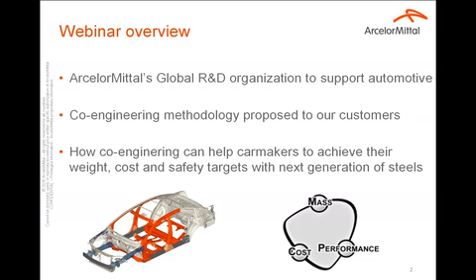ArcelorMittal is the world's leading steel and mining company, with a presence in more than 60 countries and an industrial footprint in over 20 countries. ArcelorMittal is a leading supplier of quality steel in the major global steel markets, including automotive, construction, appliances and packaging. In 2014, ArcelorMittal had revenues of 79 billion, a crude steel production of 93 million tons, and iron ore production of almost 64 million tons.

ArcelorMittal has world-class research and development and outstanding distribution networks, with 1,300 researchers in a worldwide network of 11 labs, with also $259 million invested in 2014.

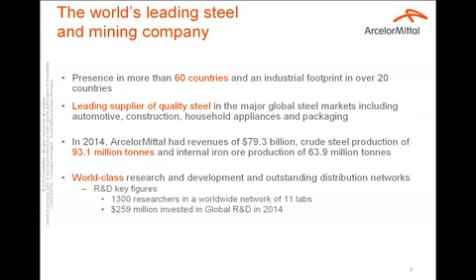Global ArcelorMittal is also the technology leader for automotive, with 5 global R&D labs dedicated to the automotive industry. 3 of them are in France, in Europe, and the 2 others in NAFTA, in Hamilton and East Chicago. 565 engineers and technicians are adapting steel to the evolution of automotive customer needs, meaning developing new steels and solutions.

improve steel in-use properties, find anti-corrosion solutions, invent breakthrough products, and ensure technical services to our customers to show that steel has the best compromise between weight reduction, comfort, safety, and cost.

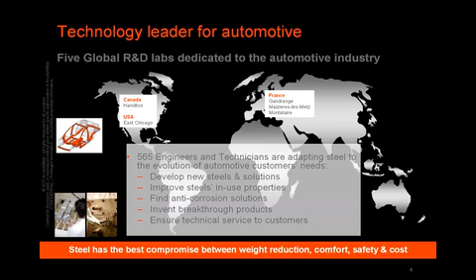Global R&D also has a dedicated resident engineer network, bringing technical support to customers around the world. We have 14 resident engineers in NAFTA, 12 in Europe, and also people from ArcelorMittal in Asia, with an office in Tokyo for the Japan market, and also resident engineers in China and Brazil.

This network has built strong and deep relationships with our biggest customers, and we are working with them in committed co-engineering programs.

Global R&D can provide technical services at all stages of the vehicle life, from advanced engineering to before the start of production - that means from 6 years before SOP till the SOP, where we are in the industrialization phase, and global R&D EVI representatives and processing engineers can support through stamping or joining issues, for example. But in this presentation, I will focus more on advanced engineering and co-engineering, where we can support the introduction of new steel grades and their industrialization and approval.

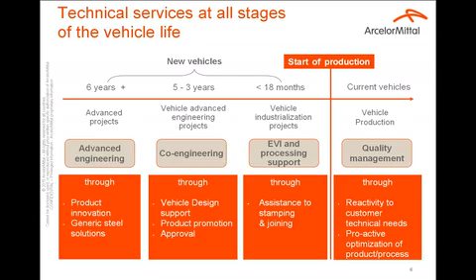This slide shows the main mission of global R&D automotive application teams around the world. Their main mission is to develop, promote and facilitate the use of new ArcelorMittal steels for automotive applications. Activities deal with steel solution engineering by design optimization, facilitating customer manufacturing - like forming, joining, laser welded blanks optimization - and providing guidelines and shop floor best practices, with a lot of simulation and experimental validations.

The teams can also provide technical support, and we have a contribution to process and product development by reverse engineering, where we look at the new generation of steels, keeping in account all specific requirements of automotive engineering. This research center has industrial size forming and welding equipment, with also a lot of finite element analysis capability, as is actually done in the automotive business.

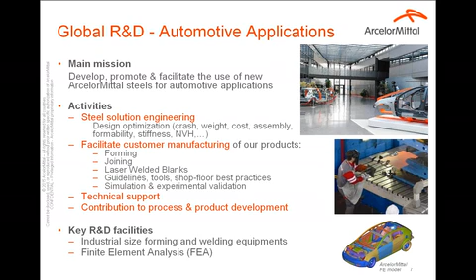That was for the first part. Let's go to the co-engineering methodology, more into details.

The objective of this co-engineering approach is to provide technical support for the design, optimization, and implementation of new advanced high-strength steel solutions. Our goal is to find and propose the best compromise between mass, cost, and performance. This co-engineering proposal is mainly dedicated to pre-projects in the advanced engineering phase of vehicle project development.

It starts always with a very important non-disclosure agreement between ArcelorMittal and our customers, and it can go through body-in-white review, to forming or welding assessments, through design and CAE optimization. Cost analysis can also be performed with our customer teams.

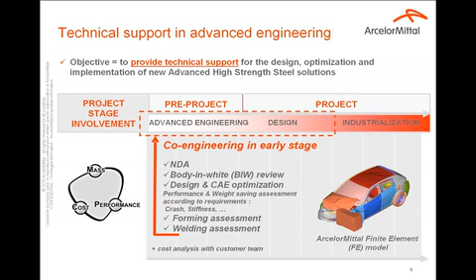Let's go into details in the co-engineering methodology. We split this methodology into 3 phases. Phase one, called body-in-white review, consists of a preliminary mass saving assessment with identification of potential mass saving solutions based on benchmark data, but also based on our steel grade properties and engineered steel solutions. I will go back on that later.

Phase two is what we call the refined mass saving analysis, based on grade and gauge optimization done mainly by numerical simulations. Phase 3 is the forming and welding feasibility assessment, where we can test and resolve different issues regarding spring back, hot stamping, roll forming, spot welding, or laser blank welding.

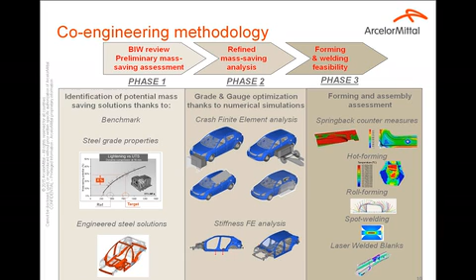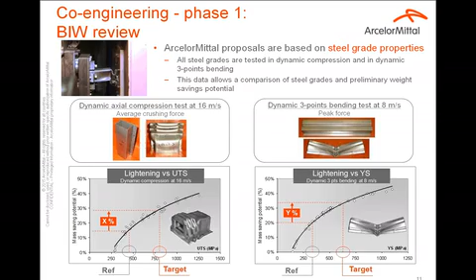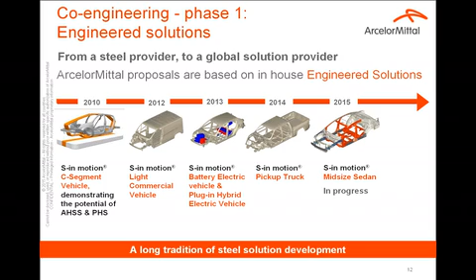As an example, we describe here our S-in-motion solution on a C-segment vehicle. We achieved a very light body-in-white proposal at 255 kilograms for an ICE powertrain on this segment, taking into account all new 2015 European crash requirements.

And then we adapted this solution to two new powertrains, battery electric vehicle or plug-in hybrid. We have shown that only 10 or 12 kilograms at maximum is enough to cope with the higher power and higher mass of the powertrains, which gives some additional constraints in the load cases and in the performance of the vehicle.

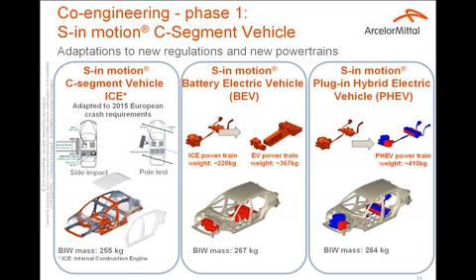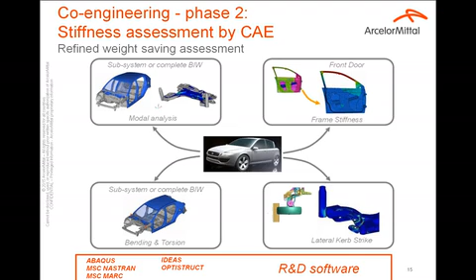As an example, here is the structural FEA capability of one of our research centers, R&D Montataire, for automotive applications. We have 350 cores available on 3 clusters in this research center. That means we can perform more than 10 full crash simulations in less than 24 hours with the LS-Dyna software. Now we will launch a video that illustrates this activity.

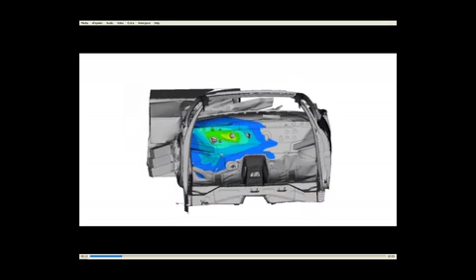Crash test simulations allow car makers to check the performance of car designs using innovative steel solutions that save weight while increasing safety. At ArcelorMittal's research center in Montataire, we run crash test simulations as a service to car makers so that we can co-design and co-engineer the car parts of tomorrow efficiently.

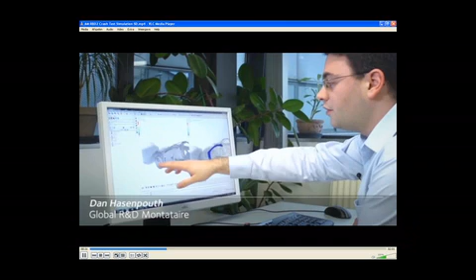We see here a simulation of a frontal impact. Here we have a barrier that represents another vehicle. What we can see is that there is a high level of intrusion using low steel grades, as shown in this picture, and we also see a lot of deformation.

I will show you now when we use higher steel grades. For example, we use Usibor on this part, and we see very low deformation and also a reduction of the intrusion for the passenger. So we increase both the crash performance and we reduce the weight of the vehicle because this part is thinner.

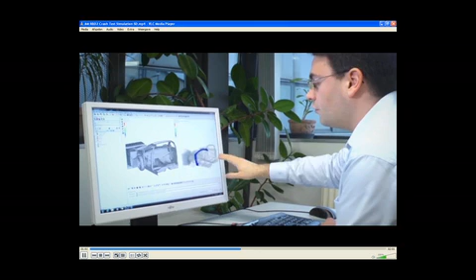These services to OEMs can begin up to 7 years ahead of a vehicle's commercial release, saving precious time and resources for vehicle manufacturers.

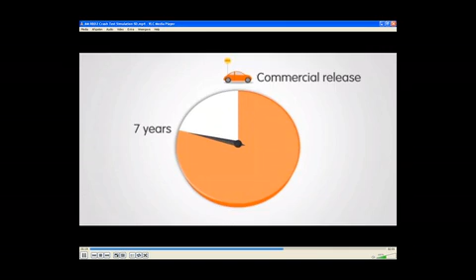The fact that we can do simulation here allows us to propose and test a lot of different solutions while avoiding doing actual crash tests that are both very expensive and very time-consuming.

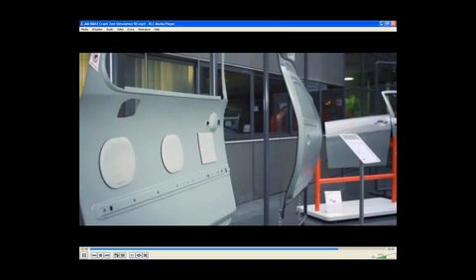We encourage car makers to approach us at any time in the design process to test the crashworthiness of their designs and of our new lightweight steel solutions.

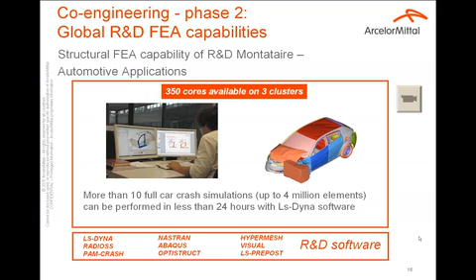Now let's go to phase 3, where we are looking at industrialization assessment. First, the assembly assessment, which is very important when we are proposing or dealing with a lot of advanced high-strength steel in the body-in-white structure.

Regarding assembly, we developed a 3-step strategy for validation. The first step is the use of assessment tools that we developed.

We run a kind of risk analysis very quickly, so we can identify all vehicle stack-ups and define the most critical or difficult ones.

Then, in the second step, we can run some numerical simulation using the software SORPAS, but with in-house or adapted data for each steel grade.

These simulations are really helpful to give optimized parameters in welding to get a satisfying welding combination.

Then, of course, we can go to experimental validation for the most difficult ones.

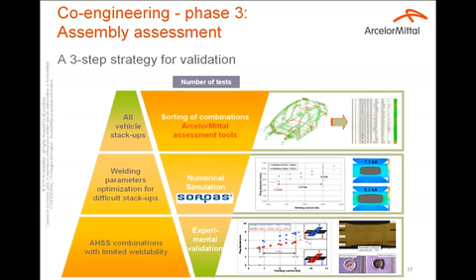Regarding forming assessment, we have the same approach, an iterative approach, from expert validation to a one-step simulation approach, and incremental simulation for more complex parts.

Then to very complex simulation like for hot stamping, where we have developed a thermomechanical simulation for our Usibor 1500 product and PHS family.

This technology has now been transferred to ESI company and is available in PAMStamp software for running hot stamping forming simulation.

Same for spring back control with our UTIFO tool, which is now also in the PAMStamp package.

And then, if needed, and especially with our customers on specific programs, we can go to experimental parts by tryouts. As an example,

Here we present the hot stamping feasibility assessment we run on laser welded blank door ring reinforcement, which is a very innovative solution.

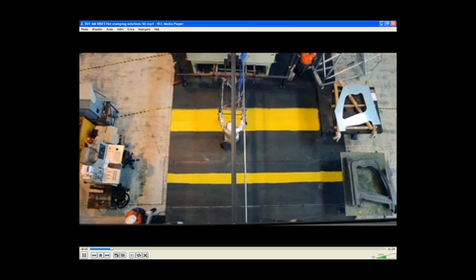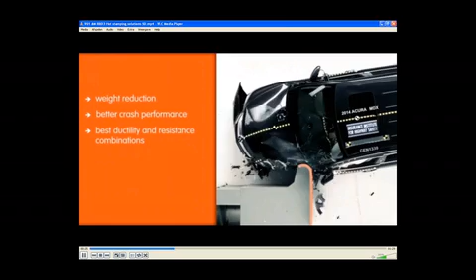Hot stamping technology provides many known benefits to car makers: weight reduction, better crash performance, best ductility and resistance combinations, excellent corrosion resistance, and lower total manufacturing costs.

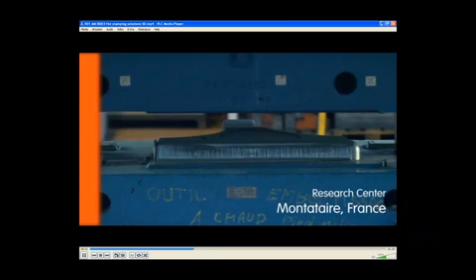At ArcelorMittal's Montataire Research Center in France, tests are carried out as a service to car makers that want to assess how specific steel grades behave after hot forming.

ArcelorMittal also has facilities to design and test specific parts using 3G geometry, grade and gauge optimization.

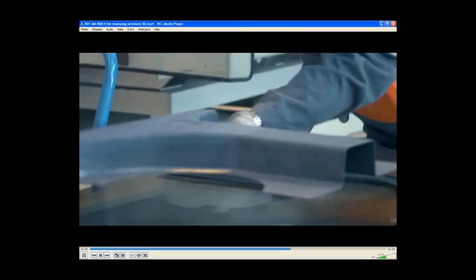We also put every effort into developing our own generic solutions, such as the S-in-motion laser welded blank hot stamped door ring. Customers can take advantage of this unique opportunity to test prototype steel solutions on a small scale prior to final testing and full production.

Thus saving precious time and resources.

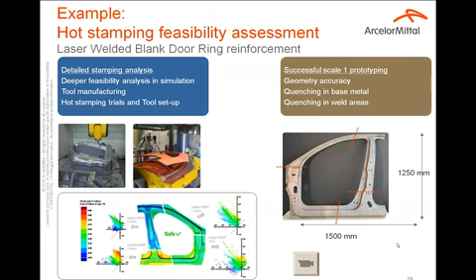The last example is the laser welded blank design optimization that you can run in this third phase, starting with a blank nesting optimization to increase the material utilization rate, which is very important for cost reasons, and also in-house forming criteria developed for weld seam area analysis in between both sub-blanks along the weld seam.

Then we can also run stamping trials. Here we have chosen one example regarding our new grade for exposed panels called FF280DP, full finish 280DP. It's a dual phase grade for exposed panels. So we ran stamping trials in our press shop on very thin gauge to assess dent resistance and red-through on door panels.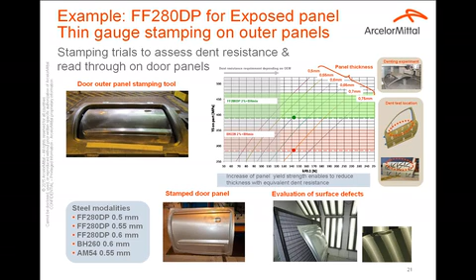So I propose to move to the last part of my presentation, dealing with the next generation of advanced high-strength steels and press hardenable steels, to achieve the weight, safety, and cost targets in the future.

Here I will present very recent results of our latest S-in-motion body-in-white mass reduction study with this new generation of advanced high-strength steels and press hardened steel. The perimeter is again the C-segment vehicle body-in-white.

We used our new Fortiform family for cold stamping: Fortiform 980, Fortiform 1050, Fortiform 1180, and also MartINsite, the latest MartINsite grade in development, 2000, and also our two new grades for hot stamping, the Ductibor 1000 and Usibor 2000.

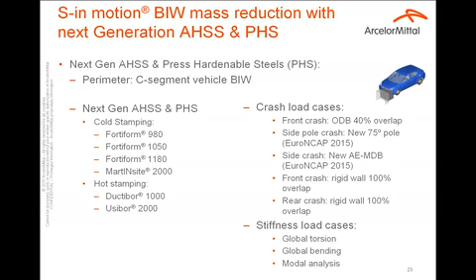We took into account, as explained before, all the major crash load cases to assess the solutions in front, side, and rear impact, and also stiffness load cases, like global torsion, bending, and modal analysis.

Some words about these new steel grades, the Fortiform family. The Fortiform family has three strength levels: 980 MPa, 1050 MPa, and 1180 MPa for tensile strength. In the table, you have the specific mechanical property targets.

This Fortiform grade has high formability combined with high cut edge stretching resistance. They also have very good resistance to hydrogen embrittlement.

With this high formability, we can really provide weight saving: from DP600 to Fortiform 980, same for DP780 towards Fortiform 1050, and from DP980 to Fortiform 1180. We consider that 10% weight saving can be achieved thanks to this switch.

The next generation of press hardened steel consists of Ductibor 1000 and Usibor 2000. We developed these new steel grades: Ductibor 1000, to provide 15 to 20% weight savings compared to Ductibor 500 currently used in laser welded blanks with Usibor 1500. And Usibor 2000, we estimate, can provide around 10% weight saving compared to Usibor 1500.

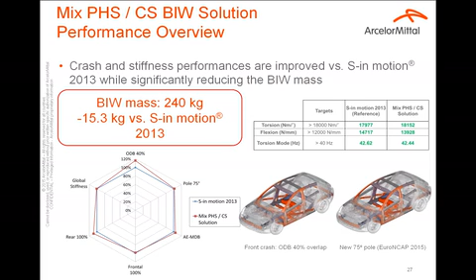In conclusion, ArcelorMittal Global R&D has a long experience in automotive steel grades and in engineered automotive solutions. ArcelorMittal Global R&D has also developed FEA capabilities, simulation tools, and equipment to support our automotive customers for the implementation of new steel grades and solutions in the next generations of vehicles.

Steel Solution Engineering clearly outlines the performance of ArcelorMittal's next generation automotive products in terms of weight savings, but also in passive safety. Co-engineering from design to prototyping, as I described today, is the best way to assess these solutions regarding all specific requirements, providing real added value for car makers.

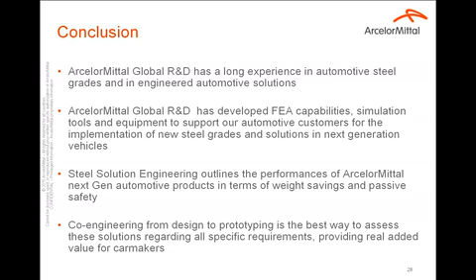Thank you, Olivier. That's an interesting presentation. We have quite a few questions for you here, so we will start off. Some of these refer to particular slides, so I'm assuming they want a little clarification, because I think a little earlier on we were struggling to hear. The audio quality wasn't great.

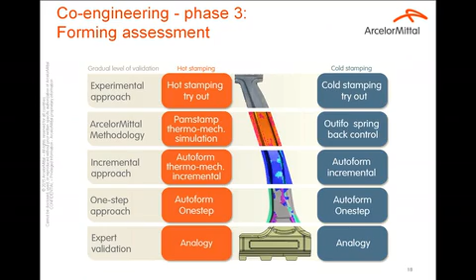But I'll start off. Questions regarding slide 14, and the question is: SPOC included? So I'm assuming you want some clarification on slide 14. Is SPOC... Excuse me, Nick, slide 14 you said? Slide 14, yes, yes, it's referenced in the question. I'm assuming the viewer didn't quite understand. So could you repeat the question?

Yeah, the question is: SPOC included? I'm assuming that's an abbreviation for something, but it's a little beyond me. SPOC, it's maybe an additional load case. I don't see the signification quite evidently.

Okay, Olivier, we'll ask the questioner just to be a little more specific about the question, so we can perhaps get a bit more clarity on that. But we'll move on to some more. We've got plenty of questions for you.

This one again refers back to slide 20, and the question is about the TWB pillar: are there any lightweight solutions together with CFRP patches?

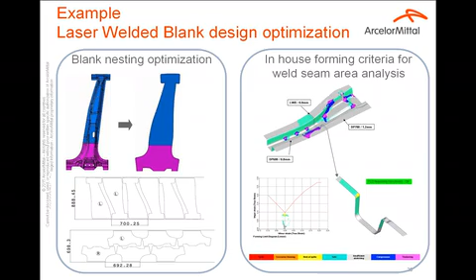Going back to the original question regarding slide 14, the question referred to small offset crash testing. Was that included? I think it's the question relative to slide 14. Yes, it's a very interesting question because SORB, small overlap rigid barrier test, is a new crash test in the U.S.

It's a very severe crash test. We think, in fact, it's very good for steel, because here we have to manage very high energy absorption on new parts, and we developed solutions to cope and get good performance in SORB for different car structures. As I presented, we had an in-house engineered solution on pickup truck. It was the first time we developed a specific solution for the pickup truck. Now we are working on a new project like the mid-size sedan, and we are dealing also to get very good performance in this new crash test, but of course always looking for very high weight saving.

Thanks, Olivier. A question here referring to your test trials and R&D centre. The question is, is it one referenced only in France, or do you have another one or a base in North America that can carry out these tests? And if not, are you planning to open one in North America?

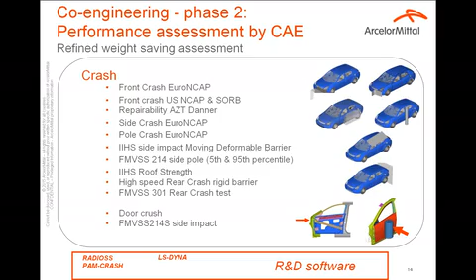Thank you. A question here which actually refers to the example of the door ring. Do you see any other parts, or future parts and combinations like the door ring in your example, being developed in the near future, maybe for other sections of the vehicle?

Sorry, could you repeat the question? Do you see other parts like with combinations of steel, like the door ring example, being developed in the near future?

Good question. Yeah, we are looking every day for new innovative solutions like the door ring. You know that we also developed this kind of technology for front and rear rails. It's already used with steel grades for cold stamping, and now we are convinced that hot stamping is also a very good candidate or technology for the front and rear rails.

Again, using the right gauge at the right place, using the right grade strength at the right place. So yes, we are developing that for different designs of front rails, for example, and some of the designs we proposed several years ago will come onto the market very soon.

Thank you, that was an interesting case study as well. Question here: what is the YS of Usibor 2000 prior to, or before, hot stamping the blanks?

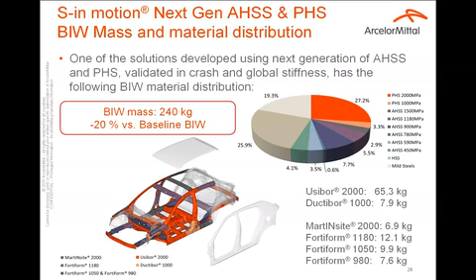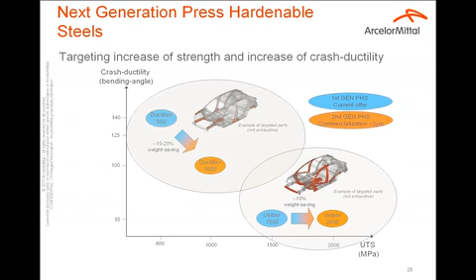Good question, is that one you can answer? I don't have it here, but I think it's quite low, like the Usibor 1500, and in fact it's not very important because before stamping you heat the blanks, so you also change the YS or the mechanical characteristics of the material. So it doesn't bring very important information, because you start with a very hot blank and then you quench to get the final mechanical characteristics on the part.

Thank you, but we can't comment further on that. All the questions will be forwarded over to yourself and to ArcelorMittal, so that if any other people need to be involved in answering them, they can get back on the questions.

Question here: what edge thinning percentage do you recommend for DP800? Good, it's a very technical question, so maybe I have to check with my colleagues dealing with that.

We have a question here, this one may again need to go back and I'm not overly clear. A customer was asking if they could stamp the new Usibor 1800, but apparently they were told no. So could you advise on that? Maybe something you need to clarify with the questioner later on. So the question was, could they stamp the new Usibor 1800 material? And the answer apparently was no, so I'm not sure on that one, and he was asking for some clarification as to whether that was the right answer.